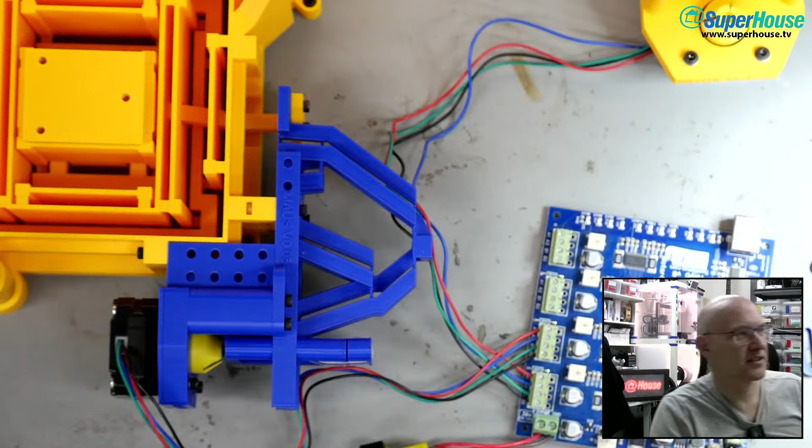Okay, I have a few things today. We are going to start with kicking off a 3D print, then we are going to slide back on over to here to do some stuff on this, and then, and this, and play around with this, and maybe with this, in fact almost certainly with that. But first, back to here. What are we doing? Oh, okay.

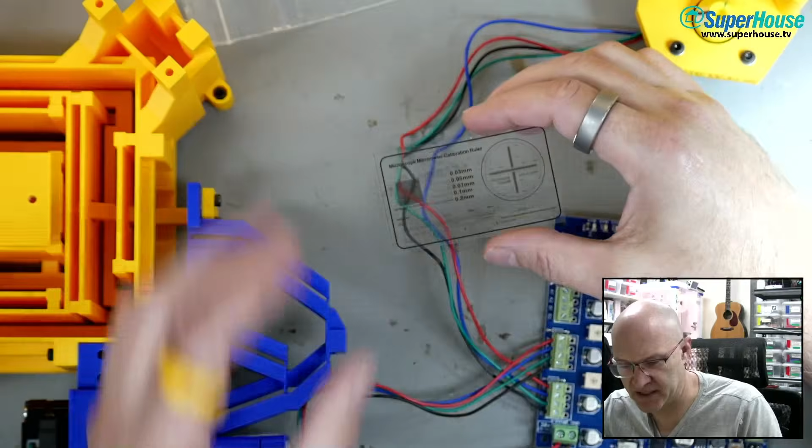In fact, I'm going to start - let's start with trying to get that set up. This is it. Paul, thank you very much for sending this. I was talking about these on a stream a couple of weeks ago, and just got to clear some space under the microscope.

Ooh, putting it on the dirty bench. I shouldn't do that. What I'm going to do is put it on a stack of Post-its, and we're going to switch to the microscope in a second and have a bit of a look at this calibration slide and zoom in as far as I can.

Is the brightness at max? I think the brightness is at max. It is. And where's the button? Where's the button? That one. See if the microscope is running. It is. So this is looking at the microscope calibration slide.

You can see the center of an X there. Where it says 0.03 millimeters slide left, that line is 0.03 millimeters wide. I'll see if I can fix the focus a bit. There we go. So that's a 0.03 millimeter wide line.

Then we've got 0.05, 0.07. Let's go to 0.1 of a millimeter. So that one there, which looks quite large and chunky, that is 1/10 of a millimeter wide.

And what else have we got on here? Grid - okay, so grid shaped. Division is 0.1 millimeter by 0.1 millimeter. So this is a grid.

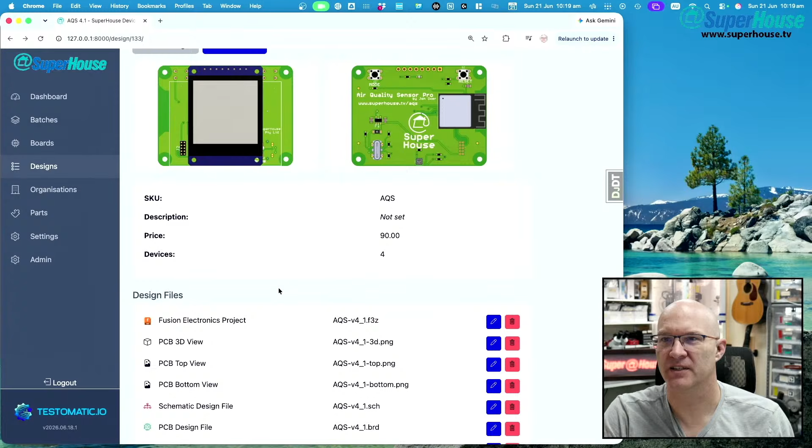This is just my local dev environment, but I've been messing around with it and loading things out of the spreadsheet of serial numbers. So yeah, with Fusion Extractor you can upload the Fusion Electronics project. It then extracts all of these things and generates the bill of materials. And if we look at that - if we click on it and download - oh, it was already... if I do this, what's it going to open in? Let's find out. Probably something inappropriate. Oh, numbers, close enough.

Yeah, so this is the CSV, which is the bill of materials that was generated out of the air quality sensor, which is a design from a little while ago. And you can see, for example, the library column, and you can see there's a discrete semi row in here - there are a couple of discrete semi rows. That'll be significant. Resistor and cap are both coming from the discrete semi library. And since I did this design, I split that - so I now have Superhouse resistors, Superhouse capacitors, and a couple of others that came off discrete semi. So bill of materials is there.

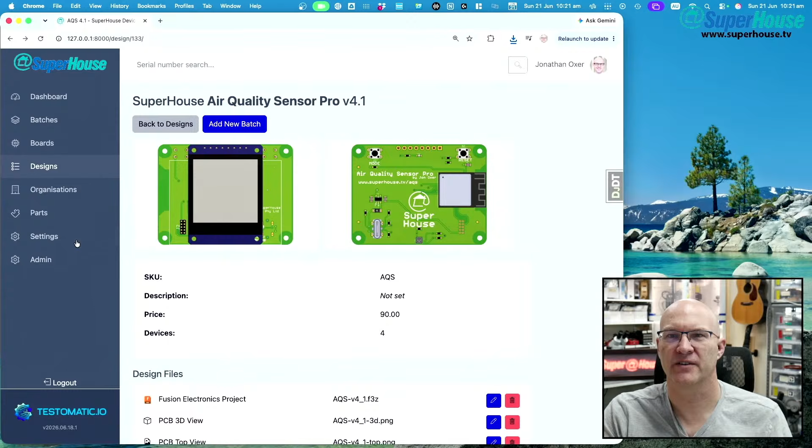Now, if we go to - I'm not going to go into organizations - there is now also a settings area, so you can define production stages, and these are all of the possible steps that we can go through in creating a circuit board. And these stages are used as building blocks, so you can just arbitrarily add your own stages, whatever you want to do.

If we go back to settings and production stage templates, there are lists of production stages. This one, for example, the basic single-sided load has these production stages. If we go to double-sided load, it's got bottom SMT assembly, top SMT assembly, through-hole assembly, etc. And the high reliability loads add stages like conformal coating and glue.

These templates are editable and get applied in a bit. So what we can do is go into batches and add a new batch. It's alphabetical, so I'll go with air quality sensor since I've been using that one. Say it was purchase order 1234 and I want to build 20 of them, and I'll apply the single-sided load template, then save.

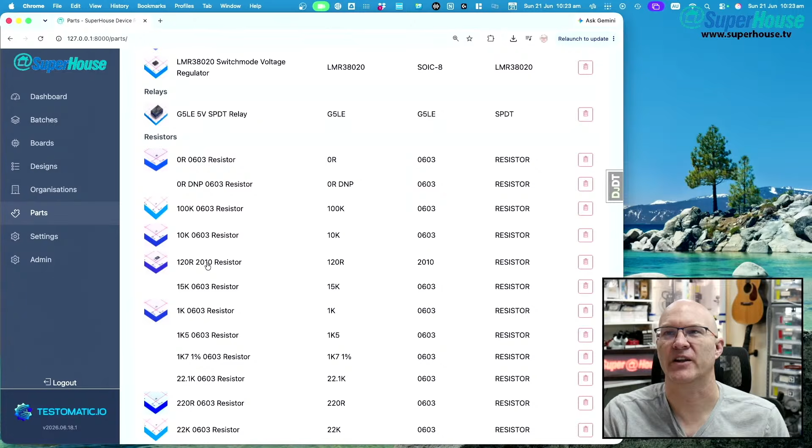Also part management. In here it's got audio, capacitors, diodes, that sort of thing. Let's find one. This one will do, like a G5—no, I'll find one with multiple suppliers. Where is one with multiple suppliers? Maybe an INA260? This one's just got DigiKey.

So these are sources and links to them, stock on hand at DigiKey, and packaging. You can have substitutions, file attachments.

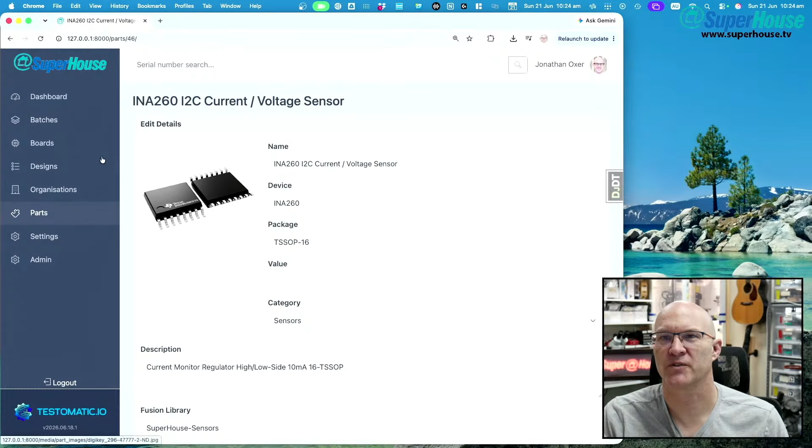And this gets auto-populated. So if I come back to parts, these are uncategorized ones. You can do an import, populate from a bill of material, so you can pull the bill of material from one of the designs you uploaded and it will auto-populate. It'll add parts into here and dedupe—so if the parts already are in here, they will not be added again.

There are also filters that get applied. And also there's a location management system for storing locations of stock, parts, and assets, like where is that feeder, that sort of thing.

We've got part categories that are all editable. Part import filters, so exclusion rules—I've got a rule that says do not import test points coming out of Superhouse connectors, do not import fiducials coming out of Superhouse symbols, so they just get excluded when you do the bill of materials import.

Transformation rules. So in this case, if I have a part in a bill of materials listed as 100 nanofarad 50 volts, it transforms it to 100 nanofarads and then does its dedupe, so you don't get two parts that are otherwise identical but just have slightly different things. That's to clean up matching.

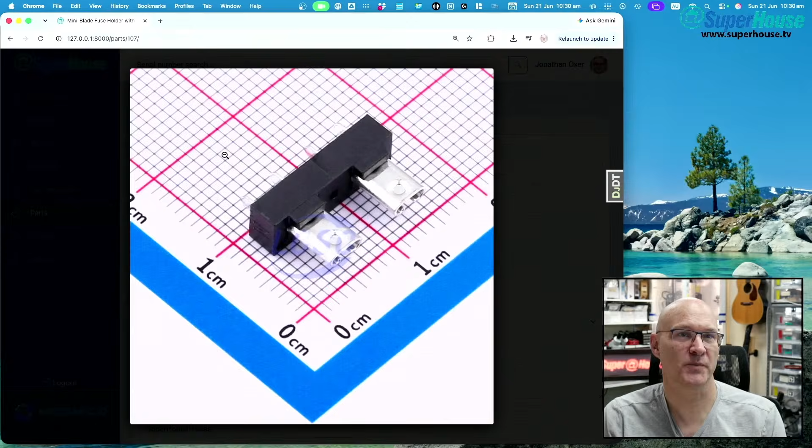So now we've got the supplier, this source record with the URL to the product. If I click on that, it's going to take me there. It's also pulled down their price breaks, their current stock, and populated the description — oh no, that was populated before, it only populates if it didn't have anything. It's added the photo, which it pulled from LCSC.

So this has all just been mucking around over the last couple of weeks adding features and things. The register is growing all of this ERP style functionality, which means one of the next stages is: if we come into batches and we wanted to build one of these and say we want to build 20, it can pre-assign serial numbers. Oh, it is, it just worked.

Disk Maker, welcome. That was Crispian who said that, but I just saw that Disk Maker was there.

And yeah, it could pre-assign the serial numbers so that the print job can be sent to the Brother label printer and the serials can get placed on the board. It could also check stock levels. What we don't have yet in parts is stock on hand — that's one of the next things to add. I need to keep track of stock on hand, like what reels I've got, etc.

And then when you say you want to build a batch, it could multiply out the bill of materials, since it's already got the bill of materials for this design, against the stock that matches it, and tell you if you have enough stock and any shortfall, and where to order that shortfall. It could then mark that stock as committed. So you might have 100 of a particular microcontroller here.

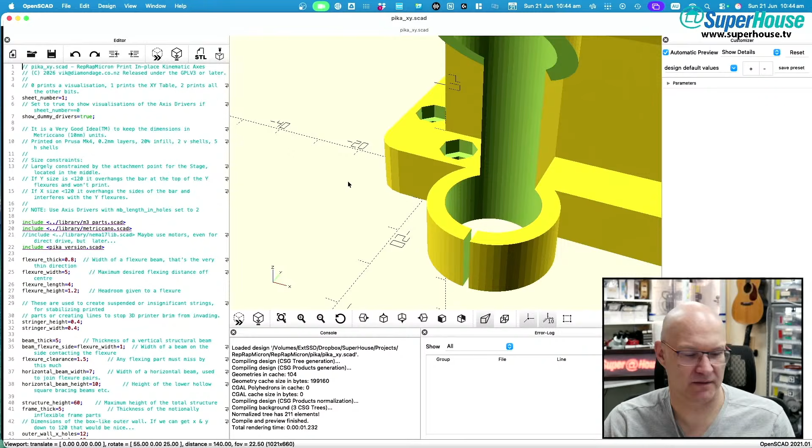Pika XY.SCAD and here. Yeah, so somewhere up here, sheet number. Okay, prints all the other bits. What does 2 print? Let's find out - preview. Yes, this is what I want.

Okay, this part here is the part that has been updated. So you may remember from previous action-packed episodes, this is the part that I had printed previously, and the spacing on the holes was not quite right. Vic very kindly has updated it, and you can see this is the updated version.

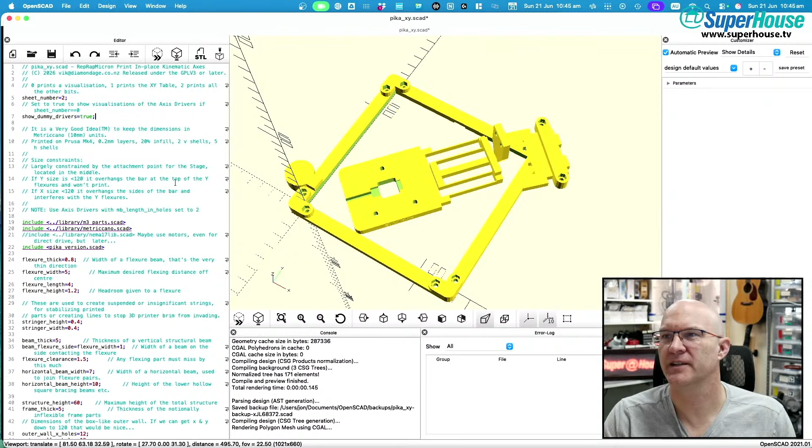I'm going to go render - is that render? I don't know. And I only need to print the center plate, I don't need to print the outer support. Ba-ding, there we go, I only need this bit, not this bit.

But I'm just going to dump it out as STL. Dropbox - no, I want to go to 3D printing. There, RepRapMicron, wherever it is, RepRapMicron, and I'm going to call it - what is this part called, Vic? The bit that sits on top and has the UV LED, etc.

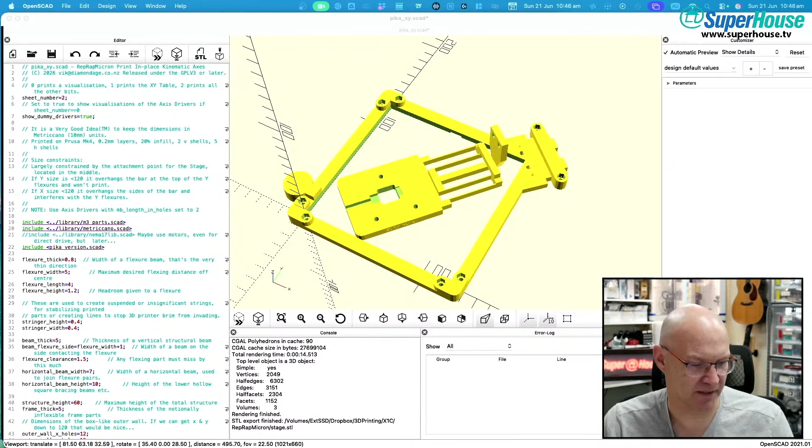iTerm, and extract my Bambu password from my super encrypted thingy, and I will see if I can log in to use my printer. Why do I have to log in to use my printer? Yes, I know, it is a trade-off that I have consciously made. Do you want to synchronize your personal data from Bambu Cloud? Yeah, sure, and that is the trade-off - all my stuff being kept synchronized and being able to push remotely to the printer and all of those things. Okay, I am selling my soul for convenience.

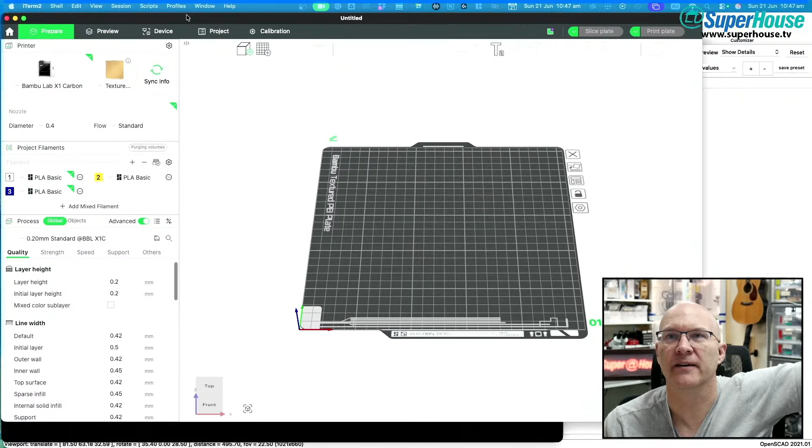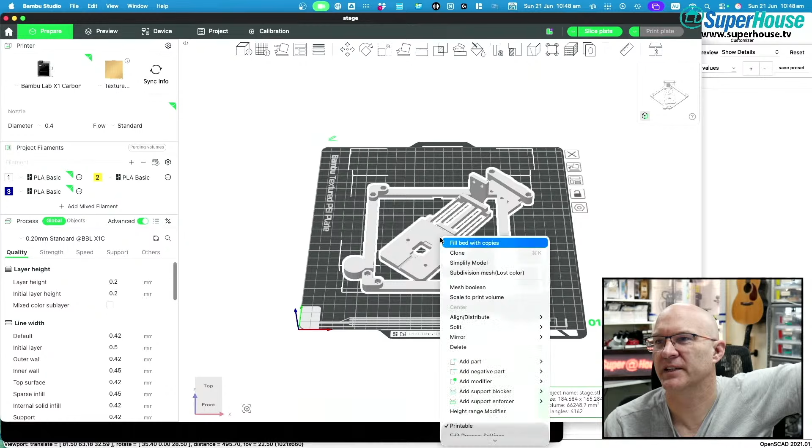So, prepare, and add. I want to do RepRapMicron - this will come back up on screen in a second. Pika, stage.stl, there we go. Stage.stl, and then I want to do split to parts. Nope, that didn't work. All right, I'll do split to objects. Does that work? Yes, and then I can delete that one.

I'm left with just the stage, and I'm going to print this one in - I think I'm going to print it in blue. As Vic or Oliver said, is the print bed clear? Very good question, yes it is clear, we can verify that. I had something printing when I left yesterday, and then I pulled it off the printer this morning, and Cyclops is there watching.

Prepare. Now, in terms of strength, there are a couple of changes to make here. Wall loops, I think, was up to 3, and top shell is on 5. What have we got? Bottom shell, I think, goes up to 5 as well. That seems about right. Is it missing an eyebrow?

Maybe, oh, I'd have to start the camera again. Wall loop 3, I think that'll do. I think that's the sort of strength settings we need. Support is off, which is what we want. That's all fun and games.

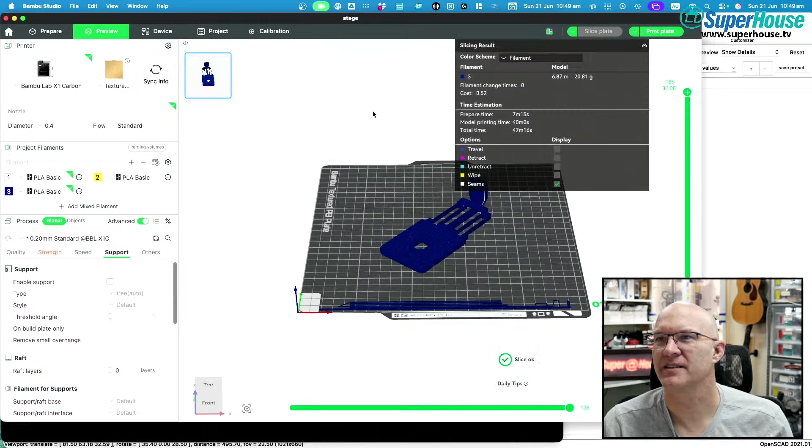Yes, okay, let's see if it does Tinker's thing. And slice and dice, 47 minutes. Yeah, we'll see about that. It's all fun and games until the printer loses an eye. Yeah.

Hopefully - so this is going to be a dark coloured stage plate sitting on top of the yellow of the Pika, which will make it really obvious where the stage plate is, rather than a simple... yeah, okay, here it comes.

I need a drink, do you need a drink? Can I get you a drink? Would you prefer hot or cold, or room temperature? What do you feel like? I don't know what I feel like. I had a coffee this morning, and I feel like another drink.

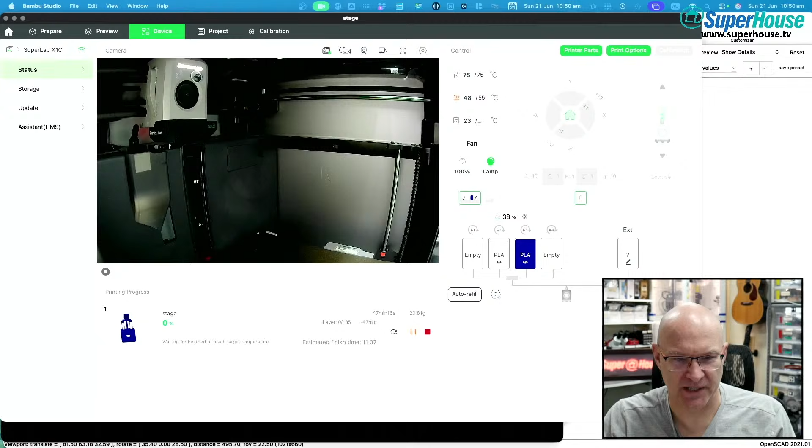Okay, so that is getting underway, printing the stage. Beer, please, says Tinker. Yeah. Stephen says John is getting a Long Island iced tea. I am not one for the alcohol.

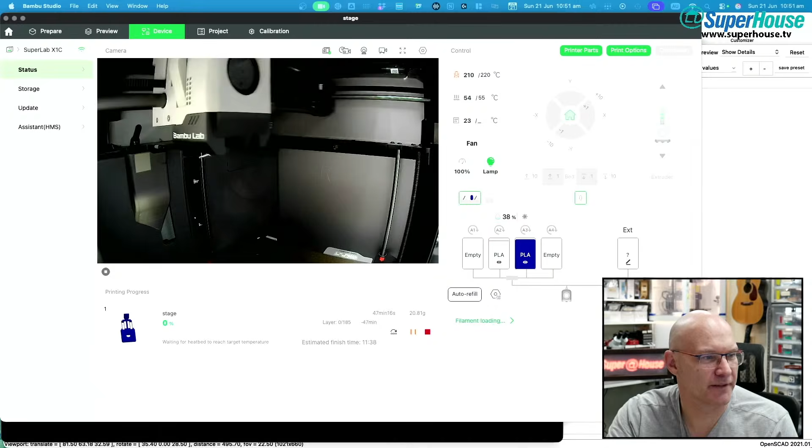Okay, so next thing is, let us - okay, I am going to bring up Session Buddy and find, see if I've got a thing open already. Probe tip fabrication and assembly, Maus axis driver construction - there it is, this is the one that I want to open.

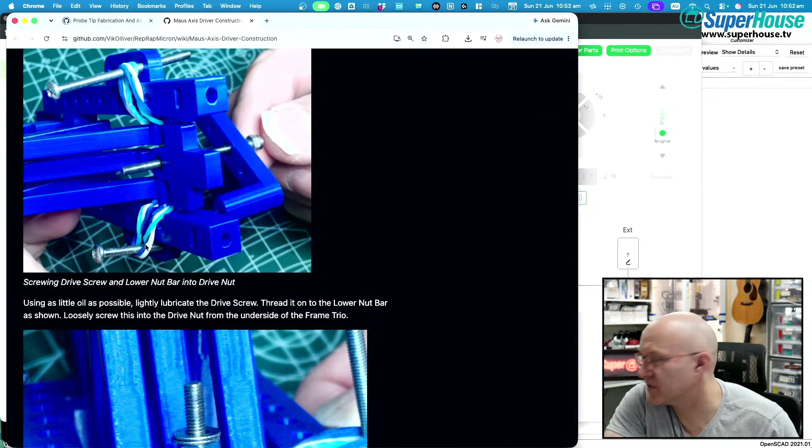Yes, okay, now one thing that I have not done is the limit switches. I've got all the stuff here, so I kind of skipped over this part, and then I went to doing all of this and assembling that. We've done this, we've put all the nuts in there for all 3 axes. Those things, do they have - no, those other ones do not yet have the loom bands on them, so there is some assembly that could be done there.

What I was thinking of doing was either attaching another stage - no, not another stage, another axis driver - or doing the limit switches. And I think I'm going to attach another axis driver so that we can drive things around in 2 dimensions instead of 1 dimension.

Which one should I use? I'm going to use green for the y-axis. It's not an entirely arbitrary choice, it's slightly arbitrary, but it's based on the fact that there's a threaded rod in that one. I could do yellow, but if I do yellow it'll disappear into the pica. I could do yellow for the z-axis. I think I'll do yellow for z-axis and green for the y-axis.

Vic says, you need the stage to hook up the axis driver. That is correct, yes.

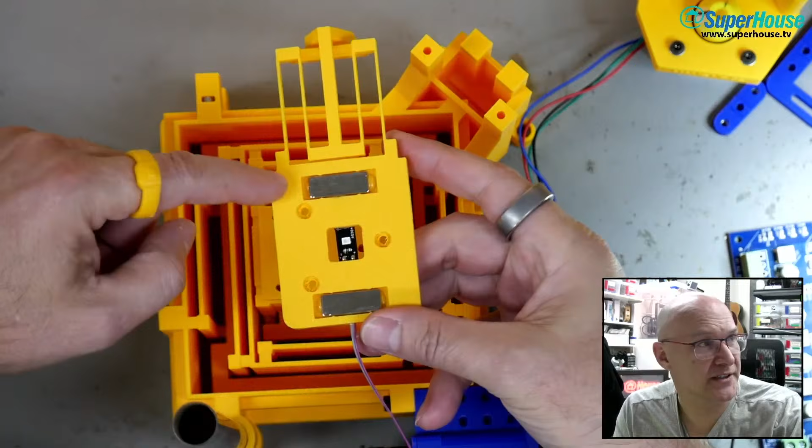So we have the x-axis driver on here, and the stage will sit there. It's not quite the right one because the spacing isn't quite right, but this will show you the idea. The stage going on like this - no, like that. I had it upside down. That would have gone well. You can see the 3 holes here to match these, and then that sits on top like that.

So this point up the top of the screen right here, this is where the y-axis driver mounts, and it pushes that way to move the stage in that direction.

So I think what I can do, maybe I'm wrong, but I think what I can do is mount this. Oh, okay. Oh no. Yeah, that works. What I can do is mount this.

Which way? I think it goes on this side, like this. Mounts on there approximately, coming in from the top left, and then this part here is what attaches to this part, but on the proper one.

So there's going to be a blue one of these coming off the printer in 46 minutes. So what I can do is mount this onto the pica, and then when the stage is printed, I can put it down in here and adjust it.

No, that way. It goes on the outside of that mounting plate there, and screw it on. So I don't think...

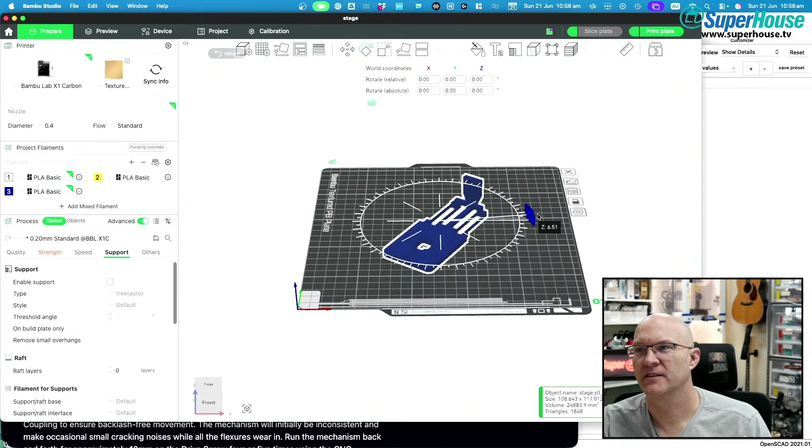But if you open Bambu Studio, we can do this right now because it's already open. So if we have a look in Bambu Studio, say I was doing a transformation to this and wanted to do a rotate, you see how it's got the three colors? So blue is the rotational axis - oops, no, that's if I grab it.

What if I grab it in the middle? Nope, not rotate, okay, cancel that. Where is the translate? Yeah, move. Okay, so red is the x-axis, green is the y-axis, and blue is the z-axis. Yeah.

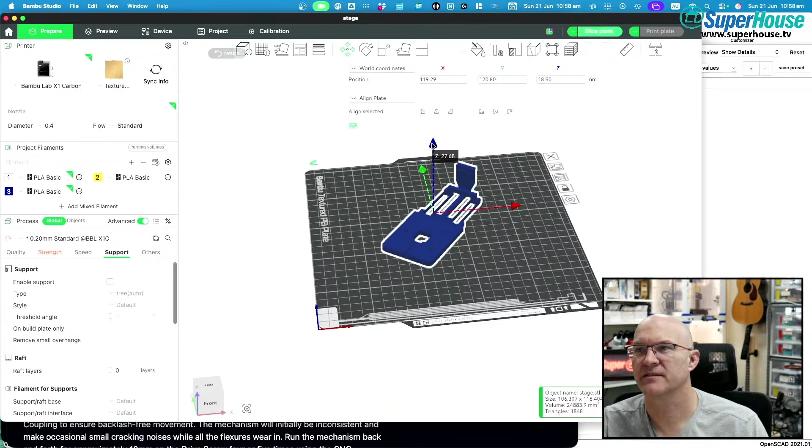Stephen says, pretty sure the orientation selector in the top corner has colors in Fusion.

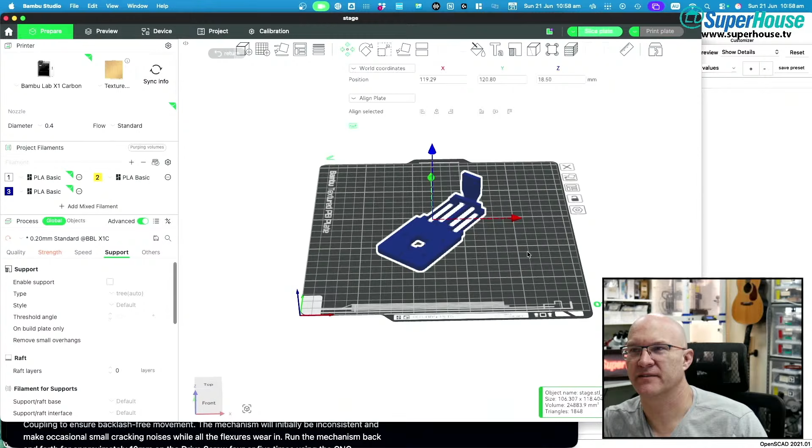Vic says, you could probably just mount the stage with 2 screws for a demo, but it will need to be propped up 3mm off the central XY pillar. Tinker is saying, yes, X, Y, Z, red, green, blue.

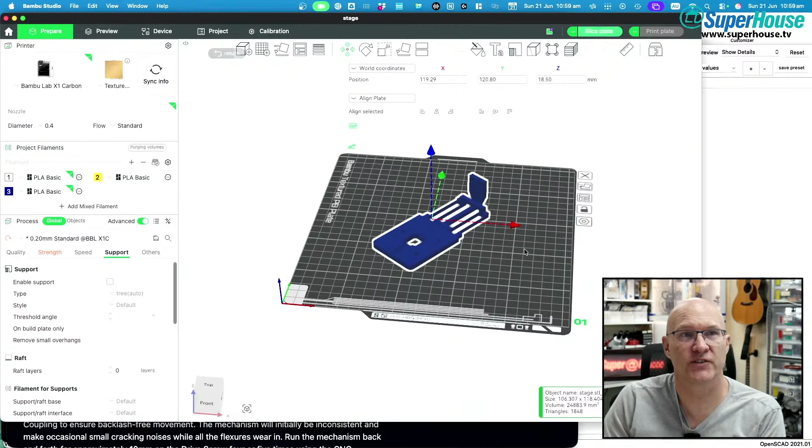Ooh, red, green, blue, okay, that is... I want to get this right. And this is something that... Red, green, blue, yeah, let's do it. Let's do red, green, blue in that order, because it does match my recollection.

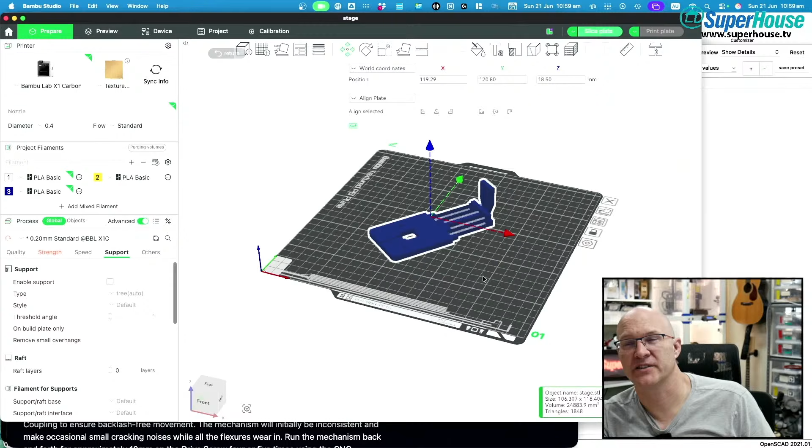What's it called? I don't know, I've gone blank, but it does make sense. Let's standardize on red for X, green for Y, blue for Z - X, Y, Z, RGB, I like that. It matches what's in Bambu, and my vague recollection of Mac 3 and other things. Tinker says FreeCAD does it that way too.

All right, what that means is... oh, same in OpenSCAD, says Vic. Now that it's been explained to me that it's in the same order as RGB, X, Y, Z, it makes perfect sense, and it's super easy to remember once you make that association.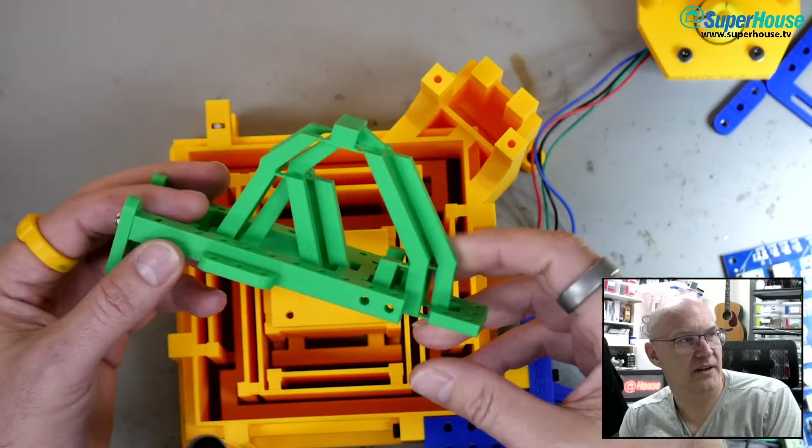So I'm going to do that. This blue one is going to become my Z-axis driver. Luckily that won't be an impediment for us today. Green will be the y-axis driver - this is the one that's going to be mounted here, and it has the threaded rod in it and is ready to go. So we can mount the green one on here, hook it up to the controller. I need to change this to a different channel anyway because it's currently on the Y channel - it should be on the X channel. We can make a little bit of progress.

Yeah, why not? However, to do that, first I need to finish the assembly of this axis driver, which involves attaching it to this with the nuts and the spacers and things in it. I need to put the loom bands in here for the anti-backlash and have it ready to go, and then I can just screw the whole thing onto the picker. So let's do that.

The yellow axis driver, I will not use at all. What I'm going to do is print another axis driver in red, then put that in the place of where the blue one currently is, and I'll move the blue one to Z, and use the green one for Y. Yeah, that's a plan. I think that plan is a fine plan.

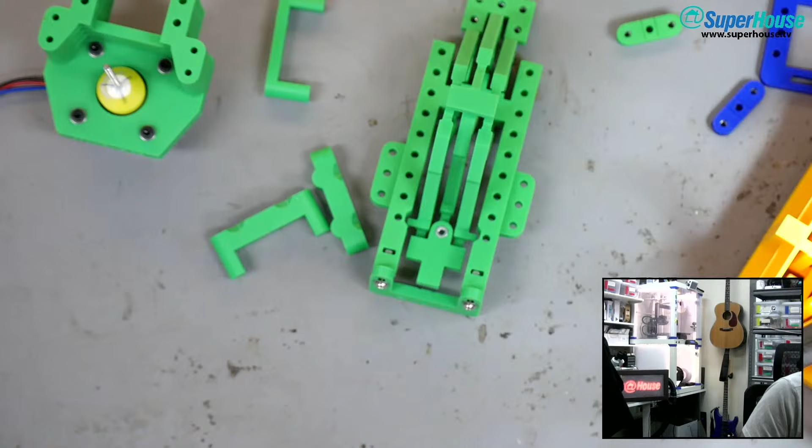Where are we up to? So then I need a couple of M3 nuts, I need a couple of M3 washers. So we have M3 nuts, M3 washers, I need loom bands. Loom bands are over here, courtesy of Princess Fiona. They can go there somewhere, I'll get to those. I think I had 3 - I'm pretty sure I put 3 per side on, so I need 6 of those.

Alright, finally getting to actually doing something. So washers - how many washers do I need? I need 2, I believe. Yes, move that out of the way. And then I need a couple of... say that one and that one. I need a couple of nuts.

They will be the lock nuts, or they are going to lock into each other to provide the positioning for the thrust washers - these 2 washers will form a thrust bearing against the face of, not that one, the face of that. Okay.

So to put this together, I am going to hook loom bands. Yeah, there are instructions, I know - I'm being naughty and ignoring instructions again. So I'm going to use those. I'm going to grab another 20mm M3. I drop these into there and there, so they go into there with the loom bands over it. Then...

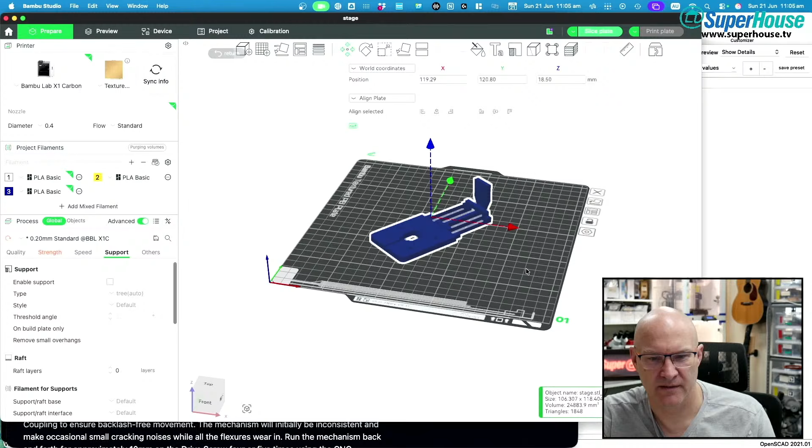No, instructions are for people who are taking advantage of all of the hard work of other people who planned ahead. Vic planned ahead. He wrote these instructions. I am just taking advantage.

All right, so we're going all the way back to here. We've got the nuts in, we've drilled out that little bearing nut. So this is the point I'm at right now. I'm going to put in some loom bands and hook them over the bolts. Then this goes through the bottom part, gets screwed on, and then there are the nuts and washers on top, and then the little cradle thing with the thrust bearing thingy goes over it.

All right, let's do this. Loom band time. So I've got a few loom bands. I'm going to hook some of those into here.

Now this is the point where I say, all right people, tell me a story. I want to hear what has been going on for all of you.

Now that can go there, and then I can drop a bolt through the middle of the loom bands and put it in there. It's not really putting much tension on it, but that's fine. It doesn't need to be, it's just got to stop them from falling off while we do the next thing. The loom bands have got to stop it from falling off.

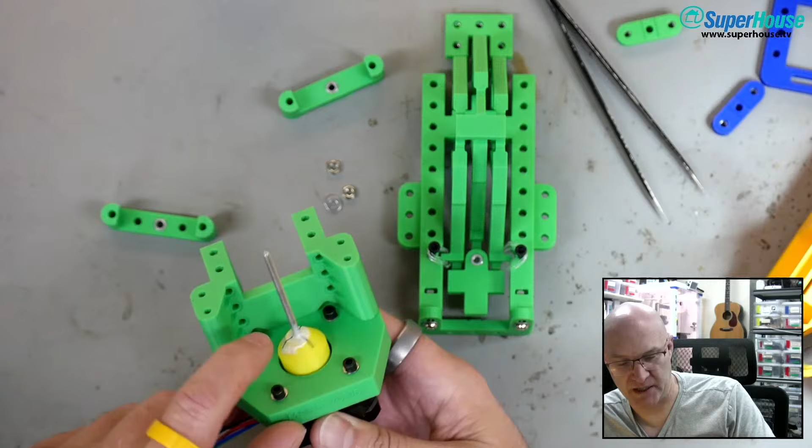I've got, instead of having the bolt in here, I've got a bit of threaded rod which has been glued into the end. And that means I can't just spin the bolt through with my fingers. I have to turn the whole motor, which is fine. That's not a big problem. It's just slightly more awkward.

And I want to go through that. Is it that one? Yes. No. Yes. Okay, I'm going to do a quick dry run on this just to see what's going on. So this is through the bearing, then it goes onto here, screws through there, then we put the nut and washers on top, and then we put this one inverted that way, which has got the other bearing thing on it. I think that's right. All right.

Amanda_RFT said, I am still in bed, got home at 4am from a live streaming job. Oh really? What was the live streaming job, Amanda? I need to take lessons.

Okay, what I'm doing is reaching in and spinning the little coupling where the threaded rod goes onto the stepper. It's going to take me a while, but I am slowly driving it down. Once there's enough, I'll probably be able to spin it from the top, and then it'll go more quickly. Getting there, closing the gap slowly. All right, let's see if there's enough now. Can I spin it? Oh yes.

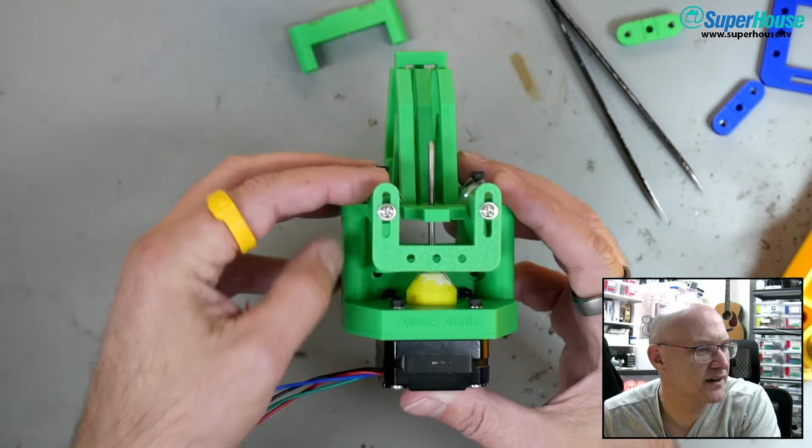Yes! Sion! Welcome! Welcome!

Okay, so... yeah, that's going to be okay. That is not a problem. And it is not... I'm pulling it down against it now, and it is not offsetting this by too much. So I think we could proceed with the assembly.

So I think the next step is I need to... 1 millimeter of clearance is clearance. Yeah.

It's like in striking, something that my second coach, Shane, says is a miss is a miss. Which is basically, the point is, it's when you're doing slips. So if someone throws a jab at you, and you slip to let it pass, the point is, it only has to miss. You don't have to have lots of movement, lots of clearance, you just got to move just enough that a miss is a miss. And it can touch you and still be a miss.

Yeah, Stephen says, doesn't matter if you win by an inch or a mile, winning's winning.

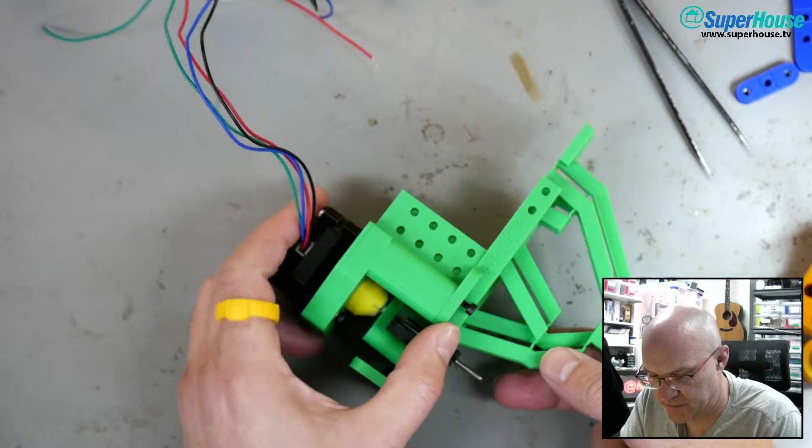I'm just going to put it on its side so I can put a little bit of force onto it. Like if I take it out from the outside, there, it should reach down to engage with the nut that is in the bottom of that hole. So it goes all the way through. That should be pretty much touching the nut now. So why? Oh, that's better. Okay, a little bit of force, and then it found its purpose in life. And then I'm going to put one in this hole as well.

Clamp that down tight. All right, wonder if I should have put washers under those. Maybe I should have, rather than just have the head of the bolt bite down into the plastic. But I think it's probably okay.

I don't know, what do you think? I think I might take them back out. Did I do it on the others? No, I didn't do it on the other axis. Picklever said I didn't use washers. You didn't? Okay, in that case I am trusting the voice of the master.

So I'll just make sure those are tight. Put a couple more in. There are a total of 4 of these. Screw it all down, and then we can put the...

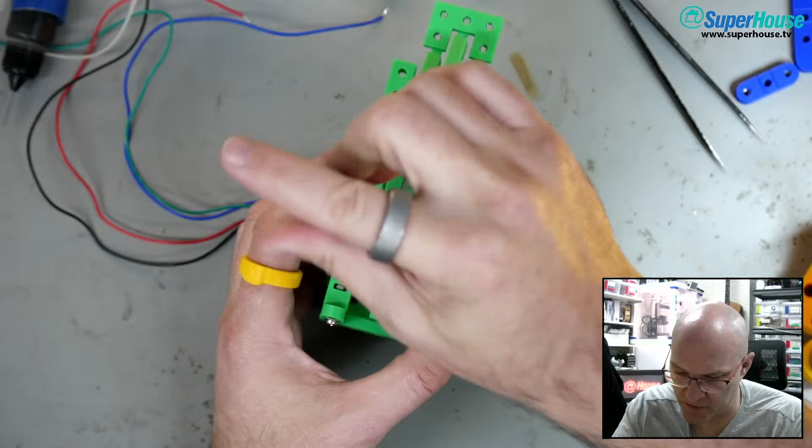I haven't actually checked the status of the 3D print that's running. Hopefully it didn't freak out, like with a spaghetti detection or something, so it's not going to finish in time.

All right, that is now bolted on, and I screwed it down so that the position of this is essentially in its neutral position. If I put this across underneath, you'll see that the position of the bottom of that tab aligns with the bottom of the rest of the frame. It's in its neutral, unstressed position, just sitting there.

But if we turn this, it'll move up or down. So I want it to be in its unstressed position while I'm getting everything else set up. Okay, that's good. And I don't need the loom bands anymore.

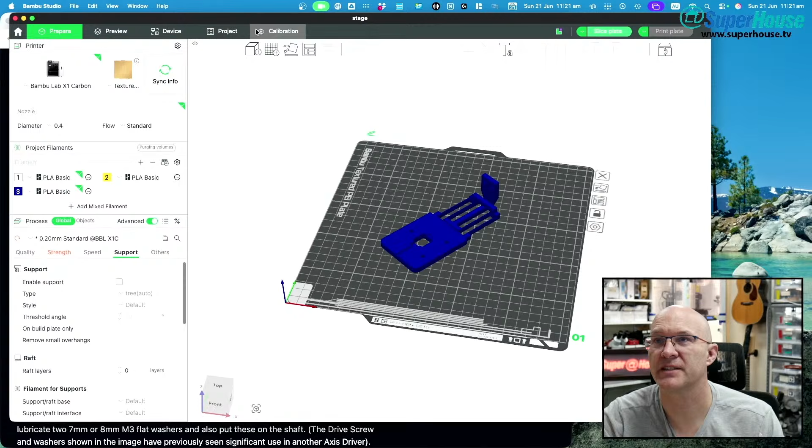Where is... did I leave Bambu Studio running? Oh, there it is. Okay, so here it is. Let's see what the printer is up to. Are you still printing? Oh yeah, it says it's running. There we go. The stage is being miracled into existence by Vic's other invention.

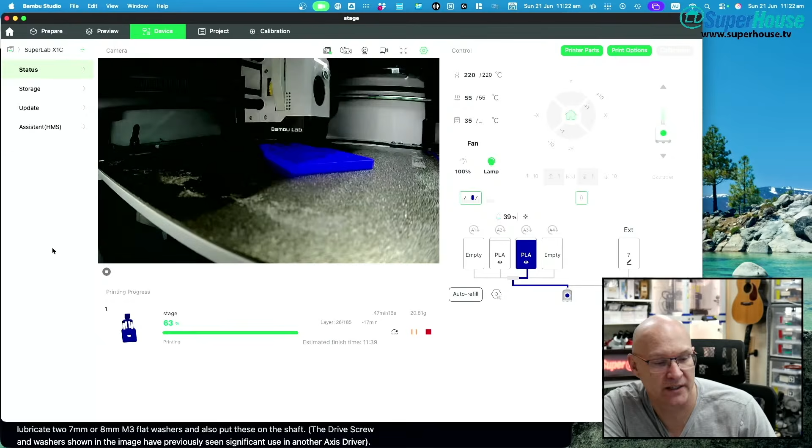One of Vic's inventions miracling another of Vic's inventions into existence. We're living in Vic world these days.

Okay, so I need to... what do I need to do? I'm going to switch back to instructions. Those are on, so I've got to put that in, then 50mm bolts go down through there. Are they 50s? I think they are. I definitely need more 50s.

I really need more 50s. I should have ordered more. In fact, temporarily I'm going to have to take a couple out of one of the stages in order to do this.

Because when I ordered the 50s—I think I said this on a previous stream—I knew that I needed 50s for the drive mechanism. So I ordered a 10 pack of 50s thinking that was all I needed, and I'd have 3 that I use and 7 spare. Turns out you actually need quite a few 50s per axis. So I don't have enough.

Oh, hang on, yes I do. Yes I do, because I've got all of the 50s. Oh, we are saved, people.

Another one of those things where I did not... ordered a 1,000 pack. Yeah.

Yeah, you can use the 50s with the shank for the deep ones, Stephen. Yes, that is exactly right.

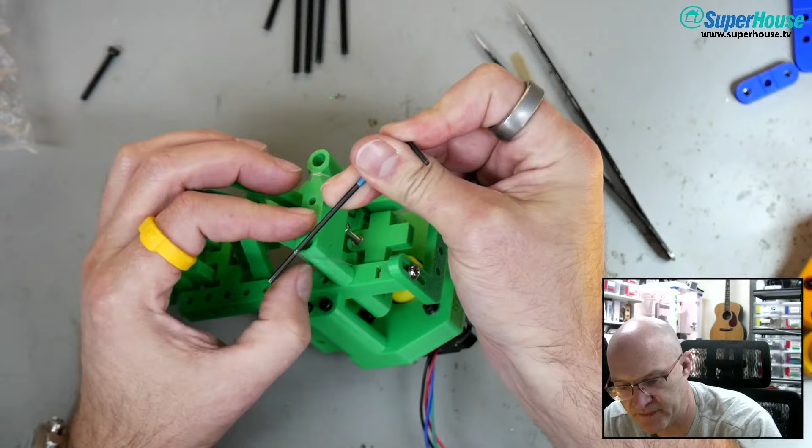So I'm going to pull the loom bands up to give myself clearance, pop that through and hook it. And then I've got to do the same on the other side to get these ones up on top of that. So go through, lift it up and over. It feels like I'm going to break them, but they're probably stronger than I think.

There we go. So now we have the loom band anti-backlash mechanism pulling it up against the thread. And I'm going to see if I can sit this still. If I turn the thread, I can move the mechanism. But first, I need to do up these nuts against each other, the lock nut mechanism. That should be reasonably well supported. I'm just thinking about whether I will damage that in this process, but I think it's okay.

How am I going to do this? I'm going to use needle nose pliers and a hemostat, I think. It's probably the best thing I've got for getting in there.

I need to turn these two nuts against each other. Yeah, so screw that top one up until the thrust bearing essentially is just against that face. And then I'm going to hold the top nut and turn the bottom one. So I've got to lock that one in place and turn the bottom nut to jam up against it. Turny, turny. That's it. I think that's pretty well locked on. So now we've got that thrust bearing up against the bottom part there.

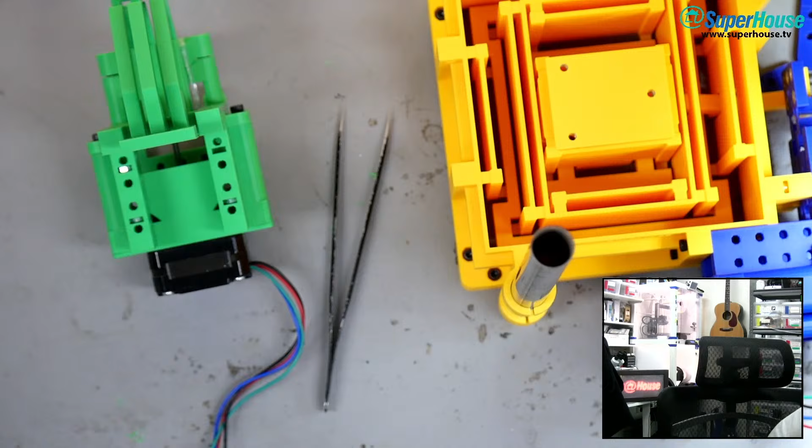Vic said you only need the 2 bottom nuts. Oh, blocked, bad word detected. Yeah, I can't even manually activate it. I think because it had the word nuts, perhaps. All right, I'm not going to put the top one in then, I'll leave that one off.

And bolt this, yes, so I need to check does the stage have the corresponding holes. So those 2 bolts that go through there are the ones that go into the ones I just put in. Oh yes, there is a nut in there that you can see, that is going to be bolted in from the top. Oh, that worked, okay.

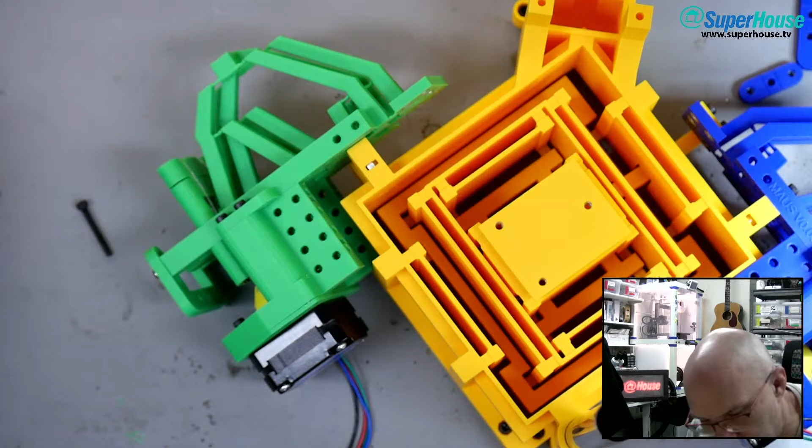Now what length do I need to get into that? Maybe about a 20. Yeah, I think a 20, so I'll grab another 20. I need a couple of 20s to go in from here, and then from the top, what do I need? Yeah, more 20s. Hang on, that's not a 20, one of these is like a 16 or an 18. Oh no, those are 20s, this one is something longer, that's a...

Would this be long enough? No, okay, the 20s aren't long enough, I need to go one size up, I'll go for 25s. There we go. Oh, that badoink was the printer finishing. Here we go.

I will get this one in just loosely to stop it all flopping around, and the other one on the bottom. Come on, bite, find some thread, there you go. And then this one comes in from the top.

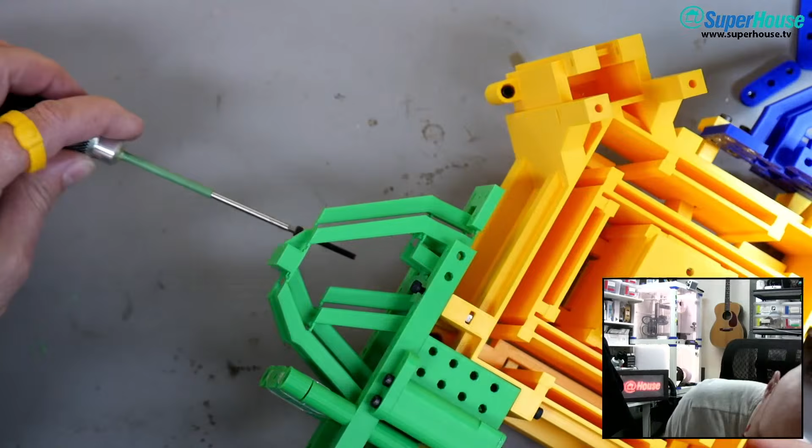And then we've got another one below this. It's getting to the point though where I need to be cautious about how I pick this up and move it, because I do not want to break anything again.

Now, why is that not going in? Oh, it is. It's slowly going in. It's working its way in.

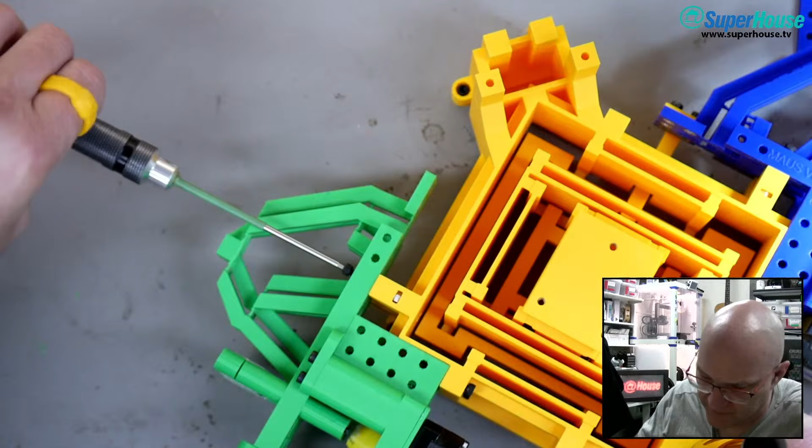Okay, now I can tighten these up. And tighten these, and then we'll have the Y-axis driver fully mounted. There we go, nice and secure. Y-axis driver in place.

X-axis down here to be replaced by a red one, Y-axis driver here, and what should have just finished on the printer is the stage. So then we can put it on here and attach it to that. And then we can try driving the Y-axis. What's the time? 11:42. Yeah, we'll get it driving in X and Y. I'm going looking at the printer to grab the stage.

Thank you, printer. Thank you for your service.

Oh, it's a fine looking stage. I need to glue the magnets in. I need to put the UV LED in as well. And just as a check, yes, it fits and it aligns.

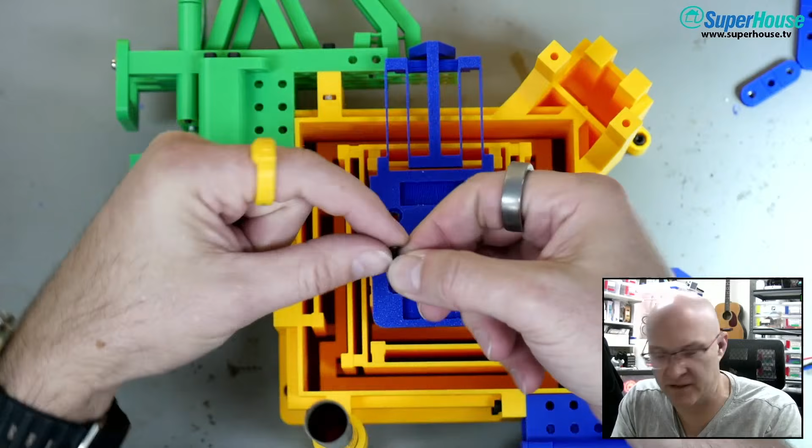And I'm going to use, instead of using cap head, I'm going to use a thin-headed Phillips head. So these are like a flat, oh, it's hard to see. It's a Phillips head, 8mm, with a very skinny flat head. And I think those will be just right for this purpose.

Let's see how far they come through the stage. Ah, nothing broke. Yep, so they stick through the stage that much. Just right. And now I need a screwdriver. And I do not want to push down too hard on this. Oh, that's nice, it just fell into place.

Yes. Okay, so I'll just put a little bit of tension on those to make them stable. And now we have a Y-axis driver. So I need to put bolts through.

Red, blue, green, black, red, blue, green, black. All right, I'm gonna...

Sorry, what I'm doing is unscrewing the motor driver. So I'm disconnecting the TinyG from this because as I move it around, it's dragging the motor driver board around and there's another stepper attached to it and it's all a pain. So with that disconnected, it means I can move this without dragging things off the table and potentially causing big problems. Oh, it's looking like a complicated structure now.

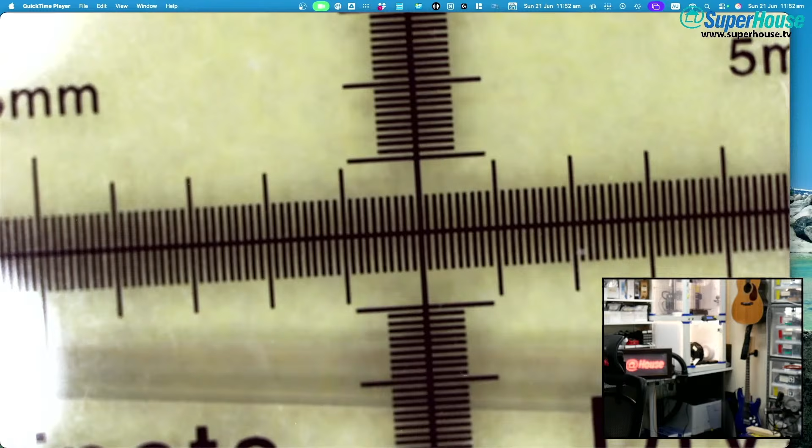So that is Paul's calibration slide. I'll move it a bit so that it's more centered. And I'll rotate it, I need to rotate the camera. Okay, so that is... more like that. That is actually straight on the stage. It's the camera that's twisted.

So I'm going to rotate the camera, to get it approximately horizontal. Something like that, that's pretty close. Fix the focus. Woohoo! There we go, okay.

Now, so we're looking at tenth of a millimeter increments there on that graduation, those little dash lines.

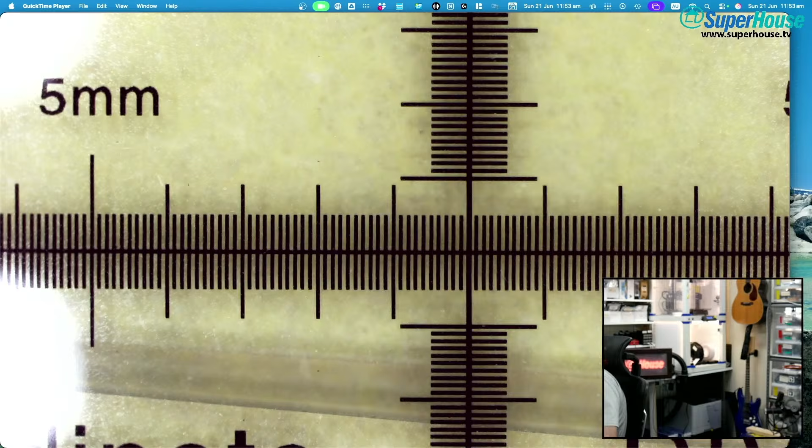And now, next step is I need to connect. Just got to think about this. I'm going to switch back to overhead view. Yeah, the focus is slightly off here. Where am I going to put this? Got to figure out where it's all going to fit on the bench because it's getting a little bit awkward here. I need to put...

So that's the x-axis, I want into that channel. This is the y-axis, which I want to put into motor driver 2, and that will then... And the thing is, we've been testing the x-axis with the y-axis command. So the configuration that is on motor driver 2 right now for the y-axis is correct, that's the one we've been using.

I've got this classic situation where, as I've been doing stuff, everything accumulates on the bench, and now I can't find anything. All right.

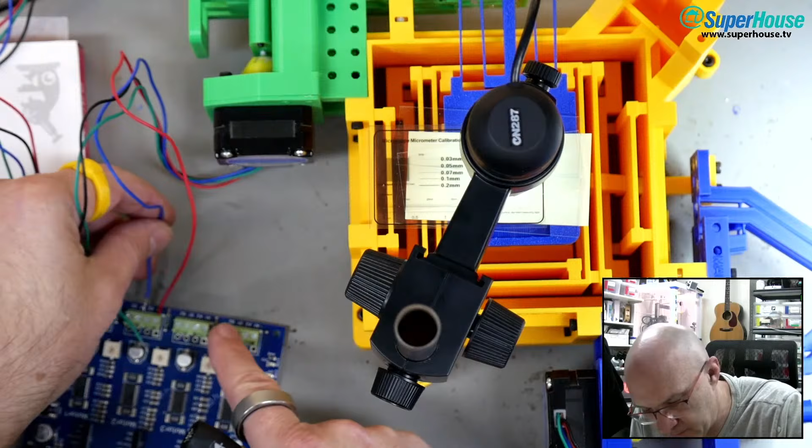Got to put this motor into channel 2. So red, blue, green, black. And I'm doing it backwards with the connections facing away from me.

Extra difficulty. Bonus points for difficulty. Come on. I can't even see where the slot is that I'm trying to put the wire into.

And there. Okay, now I'm going to remove this. So this is the yellow driver.

Yes, the yellow one, I'm not going to use at all anymore. So I need to replace this with the x-axis motor, which ultimately is going to be replaced by the red motor. It's all very confusing, but we'll get there. All right, we are minutes away from driving this in both the x and y axes.

So starting from the left this time, I'm going to do black first into B2, then green.

I should put ferrules on these. But I also need to set up a base. What I want to do is make some kind of big acrylic base, and I could laser cut some holes to mount the different things into it. Maybe screw the Pica down to... oh, I bumped it. Screw the Pica down to the base and screw the TinyG to it. Make it all so that I can pick the whole lot up as a unit and know I'm not going to mess things up by having something fall and then pull the RepRapMicron off the bench and dump it on the floor. Because if there is a way to throw it on the floor, I will do it. I need to protect myself from myself.